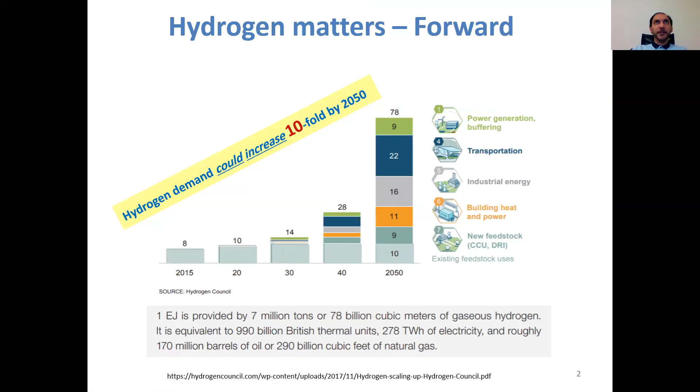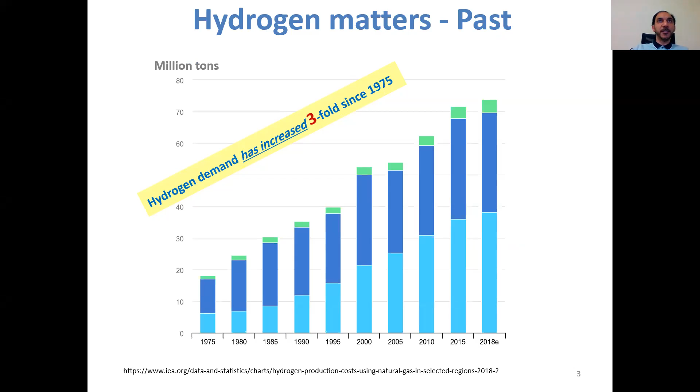And if you think, well, this is kind of a prediction, maybe it's true, maybe it's wrong. If you look at the history, if you look back instead of looking forward, you see that hydrogen demand has increased threefold since 1975. So hydrogen demand is increasing. It has been increasing for the past several decades, but it is expected to increase at a much higher rate in the next few decades.

So what is good about hydrogen? Why hydrogen specifically? Hydrogen is probably the most abundant element in the universe. If you're talking about Earth, Earth is two-thirds water on the surface, and water is two atoms of hydrogen and one atom of oxygen. So that's plenty of hydrogen out there. It is also compact. If you extract hydrogen, for example, from water, you can compress that and store a lot of energy in a very small volume, so it's a very compact energy resource. And it is odorless, if that's something that would bother you, or if you care. But it doesn't smell.

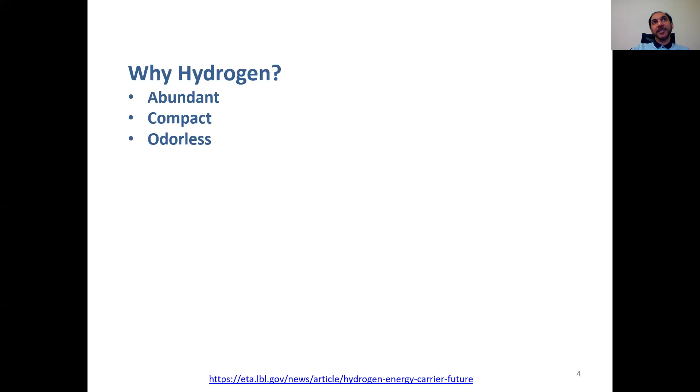Now, what is hydrogen used for? Most of the uses for hydrogen so far are these purple bubbles, the industrial applications for hydrogen. Hydrogen is used to produce ammonia, which is a huge industry, and by the way, Saudi Arabia is one of the largest producers of ammonia in the world, so it's a big industry here. Hydrogen is used for metal refining—if you'd like to extract steel, you can use hydrogen, so it's used a lot. And it is used in many other industrial applications. But that is not only where hydrogen is used.

That's not the only place hydrogen is used. Hydrogen is used for heating, you can use it as fuel and burn it to get heat. You can also use hydrogen to synthesize fuels, combining hydrogen with CO2 to produce methanol or gasoline. That's a big plus because it consumes some CO2, which helps preserve the environment.

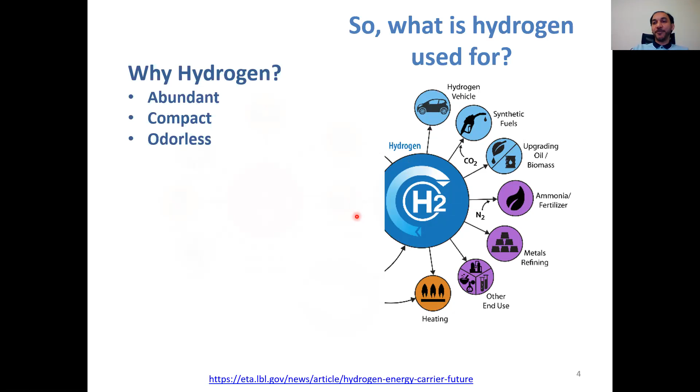In fact, hydrogen is an energy carrier. What does that mean? If you look at the right-hand side here, these are all the applications that require energy. We use energy for electrical appliances, for transportation, we need fuel, we use it for industrial fuels, and to produce chemicals. These are all the different applications that require energy.

Now, where is the energy coming from? It's coming from the left here. Energy can come from fossil fuels like oil and natural gas, from nuclear reactors, from renewables, and other means of producing energy.

Now, how do we get energy from the supply to the end use, from the left-hand column to the right-hand column? Typically we use electricity: we convert fossil fuels to electricity through power plants, burn the fossil fuel, produce electricity, transmit it through long distances, and use it on the right-hand side for electrical appliances, transportation, and industrial uses. You can replace electricity with hydrogen, or you can complement electricity with hydrogen. You don't have to replace it 100%; you can complement it, and they can work together.

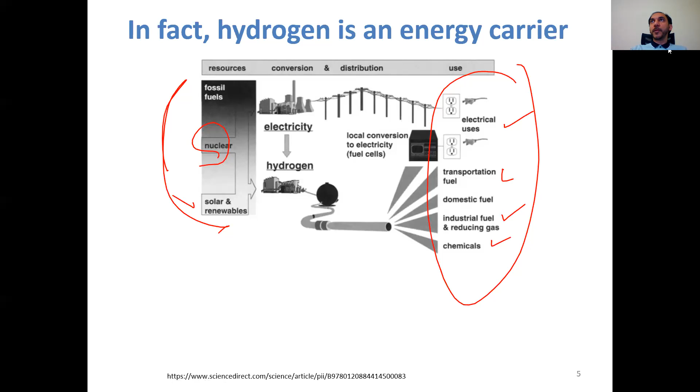We are going to see that they can actually work together pretty well, hand in hand. Now, in some cases, hydrogen can even beat electricity. I'm coming from an electrical engineering background, and I dare to say that. So sometimes, honestly, hydrogen can beat electricity, but very often electricity is a better carrier. It depends on the circumstances, but when they work together, they can do wonders.

An example where hydrogen can beat electricity is shown in this colored picture. On the left, you have renewable resources. On the right, you have consumers of fuel or energy. In the middle, there is water, let's say the ocean. We are producing energy on the left-hand side and consuming it on the right-hand side, and we'd like to transmit that energy from left to right. We can use transmission lines, electricity, underground cables, or marine cables underneath the ground, which are being used in many parts of the world.

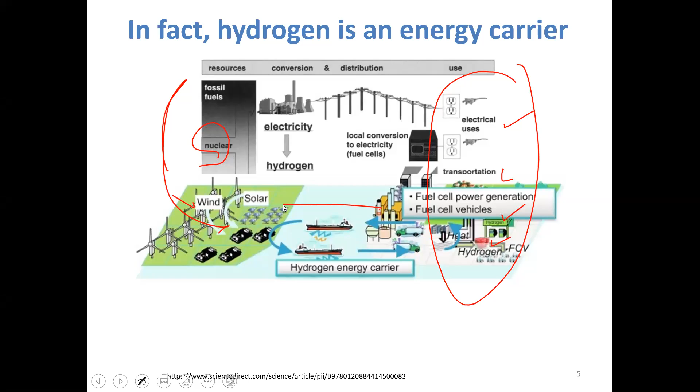But for that application, hydrogen looks like a very feasible alternative. You can turn the power produced by wind and solar into hydrogen, ship that hydrogen, and then turn it back into whatever energy form you'd like on the right-hand side. So sometimes hydrogen actually has an edge.

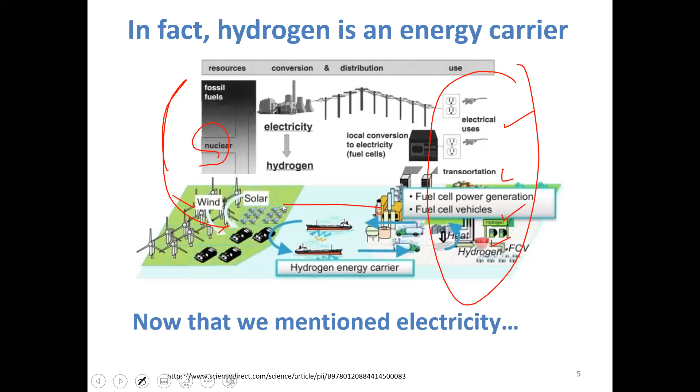Now that we've mentioned electricity, given that my background is in electrical engineering, I cannot escape talking a little bit more about it. You're probably aware that, according to Vision 2030, the Kingdom of Saudi Arabia is targeting to produce 58.7 gigawatts of electric energy from renewable resources. And if you're wondering how big that is, today's generation capacity in the Kingdom is 70 gigawatts.

So if you put all the generators in the kingdom together, running simultaneously, they are able to produce about 70 gigawatts of power. By 2030, the target is to have up to 120 gigawatts of generation capacity kingdom-wide. Out of that, about 60 gigawatts are going to come from renewables, so renewables will form about 50% of the total generation resources.

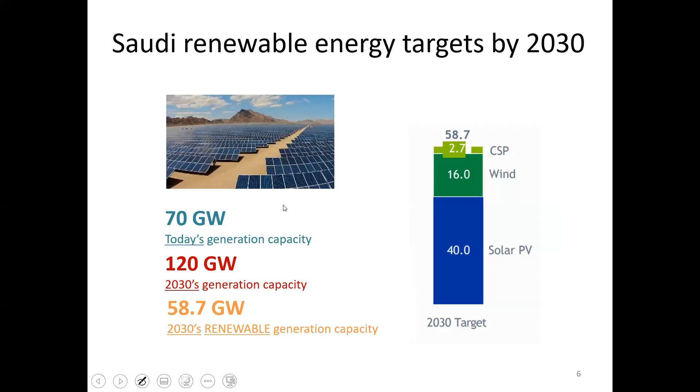That's huge. Now these renewables are going to be scattered everywhere. They're going to be mostly solar PV, solar photovoltaic resources, but there will be some wind, and a little bit of CSP, concentrated solar power. Wind is clear, you produce electricity from wind. The difference between solar PV and CSP is that in solar PV you convert the light from the sun into electricity, while in CSP you convert the heat produced by the sun into electricity. So the focus more in Saudi Arabia is on solar PV, but there will be some small capacities of CSP also, and some wind.

Now, the challenge with renewables is that they require a lot of flexible resources. What do I mean by that? This curve in front of you is called the net load curve for multiple years, for a typical day in the year. The x-axis is time, 24 hours, and the y-axis is the electric load consumption in California. This is taken from California ISO, the California Independent System Operator.

This is actually not the load, this is the net load. The net load is the load minus the solar PV power output in California. So net load equals load, the electric load in megawatts, minus solar PV output. That's the net load. Now why does that matter? It is the net load that needs to be met with the other generators that are not renewable generators.

There is some wind, but not as much as solar. So if I have an electric load of, say, 30 gigawatts, and my solar is producing 10 gigawatts, 30 minus 10 is 20 gigawatts, that's the net load. That is how much I need to produce from non-renewable resources. So that really matters for me.

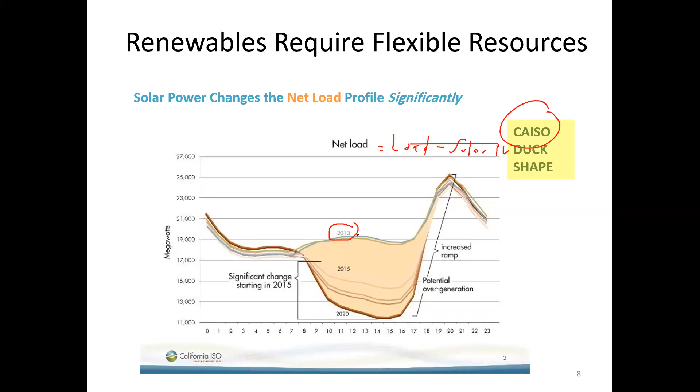Now, if you look at the 2013 curve, the blue curve here, it is kind of a nice curve. The load increases at about 7, 8, or 9 p.m. because of lighting, people starting to cook and so on. So that's an evening peak.

Now, during the daytime, the net load is reasonable. The load would have looked something like this, but because solar produces a lot during daytime, the net load, which is load minus solar, is the blue curve shown here. So solar is good, it's reducing our peak demand around noontime. It is not able to reduce our peak demand in the evening, but that's fine, at least it's helping with the peak demand at noontime.

Now, what happens if you have a lot of solar PV, which is what is happening in California? The PV penetration has increased in the past several years, and the net load looks like this brown curve at the bottom. So what is the problem with this curve? It shows that during daytime, the net load is actually at its minimum, load minus solar PV is at its minimum. That's not a problem. The problem is if you compare the minimum with the peak, you get a huge variance, a huge difference.

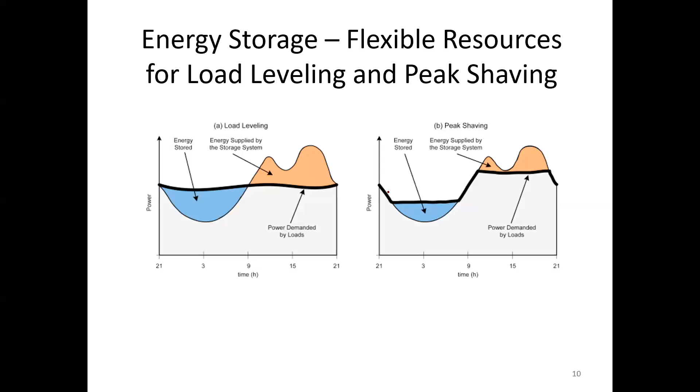One of them is hydrogen. You can use hydrogen to store energy. If you have plenty of renewables produced with your renewable resources, you can convert the additional unneeded renewable production into hydrogen. You store it, and whenever you need it, you can convert that hydrogen back into electricity using fuel cells.

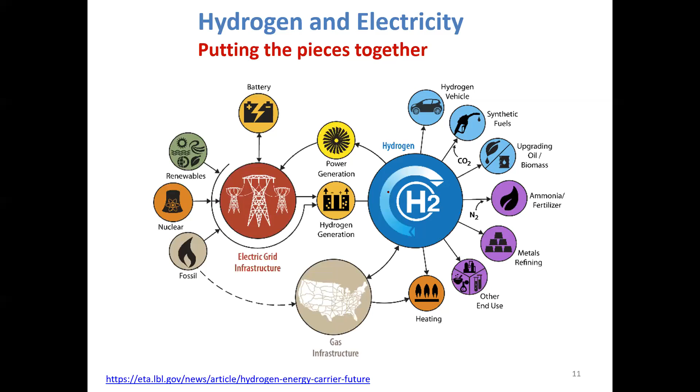So now I come back to this picture that I started with, and let's put the pieces of the puzzle together. On the right-hand side, you see the hydrogen, and on the left-hand side, you see the electric power system, and you can see that they can work pretty well together. So you are producing electricity either from fossil fuels, from nuclear plants, or from renewables, and all that power is injected into the electric power system.

There are electric loads that are going to consume a lot of power from the electric power system. But maybe during times when there is an excessive amount of energy being produced, especially from renewables, because some of these renewables are not predictable or controllable, if you're producing more than we need, we can store some of that energy into batteries, or we can store it into hydrogen.

So we run that into a hydrogen generation plant, maybe using electrolyzers. This is an electrolysis process, which we're going to talk about in a few minutes. Then we produce hydrogen. And whenever we need to produce more electricity, I can use some of that hydrogen back using fuel cells. So that is a reversible process: I can go from electricity to hydrogen using electrolyzers, and I can go from hydrogen to electricity using fuel cells.

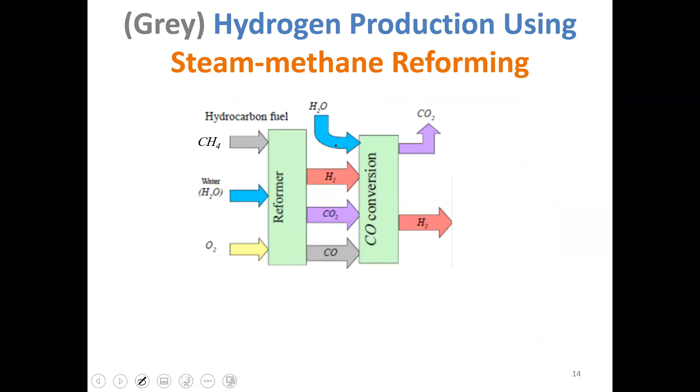Okay, why don't we do green hydrogen? What is wrong with green hydrogen? It is still very expensive. This chart here shows, roughly speaking, the cost of producing hydrogen in US dollars per kilogram of hydrogen. This is gray hydrogen on the left. This is blue hydrogen using natural gas. And this is blue hydrogen using coal. And then this is green hydrogen from renewables. You can see there is a big difference in price. So yeah, we need to work on that a little bit.

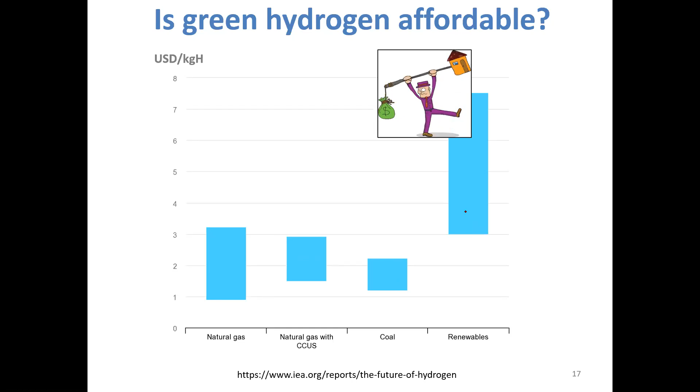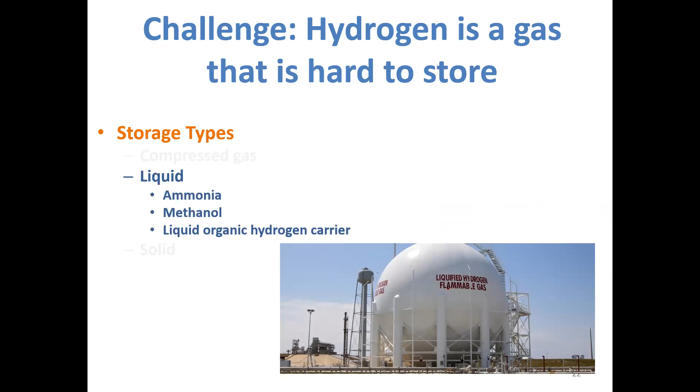We can either compress hydrogen and store it—you can see here in the figure vessels where compressed hydrogen is being stored—or it can be converted into a liquid like ammonia or methanol and stored. That makes storage a lot easier because it's not gas anymore, so you can store huge volumes. Or it can even be stored as a solid. This is kind of a hydrogen battery, if you like.

Next, I'm going to show a few examples where hydrogen is being taken seriously. I'll start with the NEOM project. NEOM, on the Red Sea on the west coast of Saudi Arabia, is building a huge green hydrogen infrastructure based on electrolysis. We'll have a lot of wind and solar, which will go into an electrolyzer to produce hydrogen.

Ammonia is made of 1 atom of nitrogen and 3 atoms of hydrogen. So we need nitrogen, and nitrogen is going to come from an air separation unit that also requires electric energy. That electric energy will come from the renewable resource on the left, which will feed both the electrolyzer and the air separation unit.

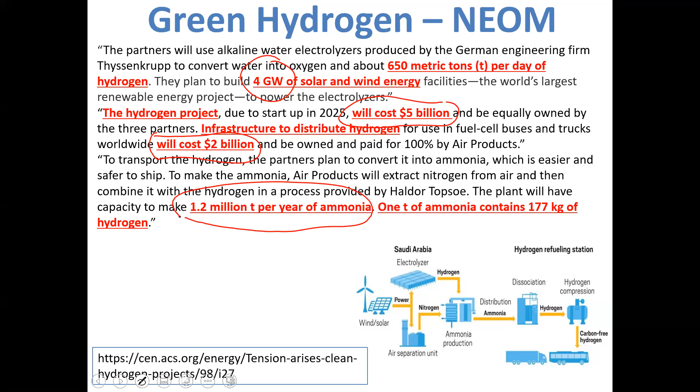And we are not alone. In Germany, they are building huge infrastructure to produce green hydrogen and to distribute it using natural gas pipelines. So they are not going to ship hydrogen using vessels or trucks, but rather they are going to use the existing natural gas pipelines.

That has its own challenges, of course. Hydrogen is a lot more explosive than natural gas, so you need to be really careful when you do that. Usually they do it in stages: they inject only 5% hydrogen, increase it to 10% and so on, in small increments, to make sure the natural gas infrastructure will be able to deal with that new gas, which is hydrogen.

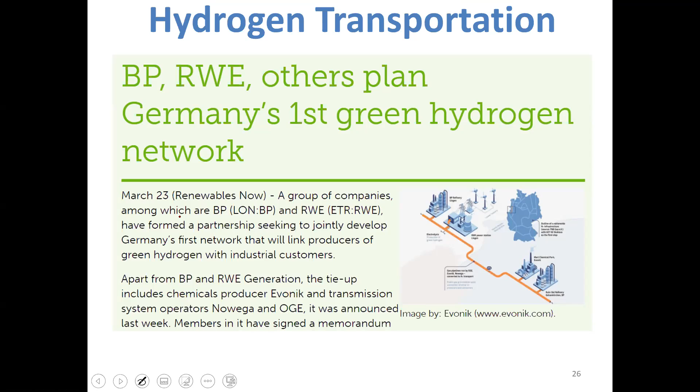I'll skip that. In Australia, they are thinking along the same lines. They are going to use renewables to produce hydrogen using electrolysis, and then convert that hydrogen to ammonia. Some of that hydrogen will stay in its gas form, distributed within Australia using natural gas networks, and some will be shipped overseas after being converted to ammonia.

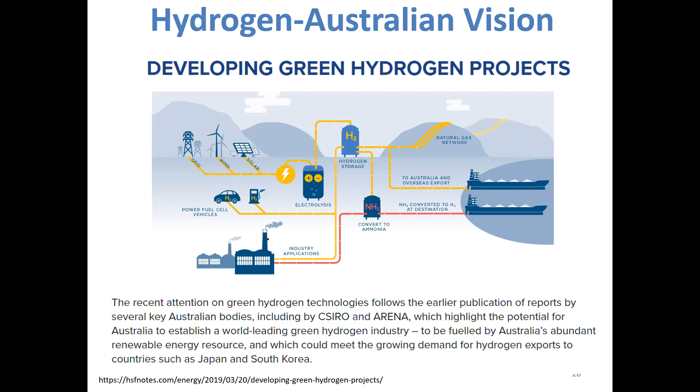And the EU has a big vision for hydrogen. They are planning to produce 6 gigawatts of green hydrogen from electrolysis by 2024. That number is expected to increase to 40 gigawatts by 2030, and even beyond that after 2030.

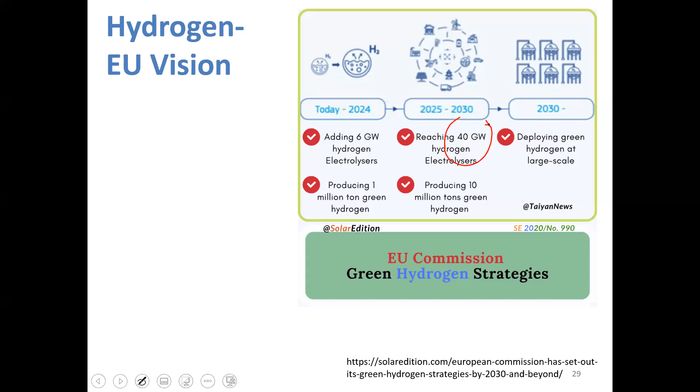The Japanese have a very interesting approach. I'm about to end here. Instead of going big, they are going small, doing distributed hydrogen. So they build small electrolyzers and install them in hydrogen fueling stations.

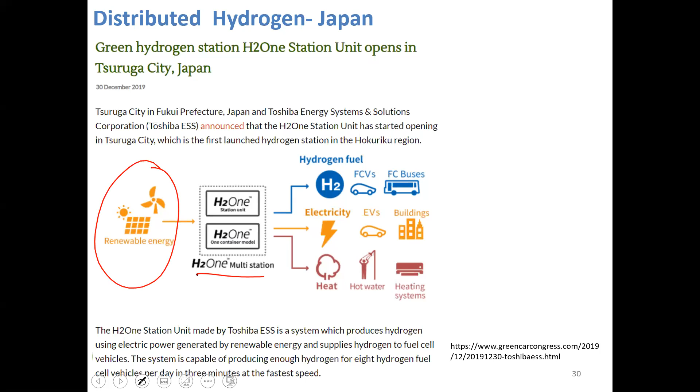So if you have a hydrogen electric car, you go to the fueling station. The fueling station itself has an electrolyzer and renewable resources, so everything is local. Renewable resources in or near the fueling station, and an electrolyzer local in that place, producing hydrogen locally, which is then injected into cars or whatever.

I'm toward the end, so I left this boring definition that's usually used at the beginning of presentations, the definition of what hydrogen economy means. I left it to the end. I thought you might be more interested in pictures and figures, so I left this toward the end here.

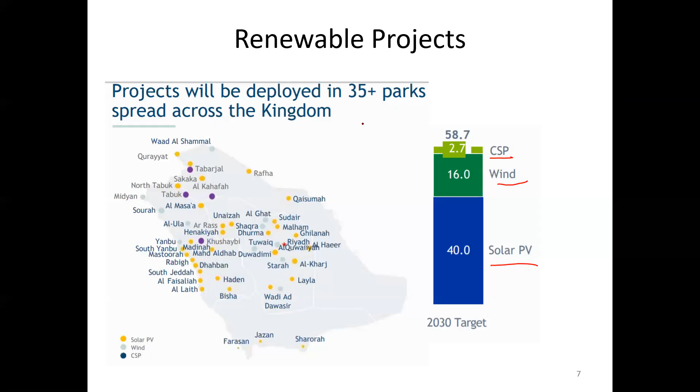So if my wind resource is producing less than what I expected, then I'll have to produce more from another resource so the total generation is exactly equal to 6,000 megawatts. That's the problem, and it creates an issue if you are using renewables. If you have conventional resources like thermal or hydro generation, these are controllable resources — if the load increases, you can increase your power output from your generators, and you're going to have no problem.

The problem with renewables is that the load might increase, and at the same time, your wind is decreasing, so you will have to compensate for that. To compensate, you either use a flexible resource like hydro, or if you have stored some of the wind energy when the wind was blowing really fast, you can use it when the wind goes down. That's why we cannot use just the average. Okay, and what was the other question? I forgot the second part of the question.

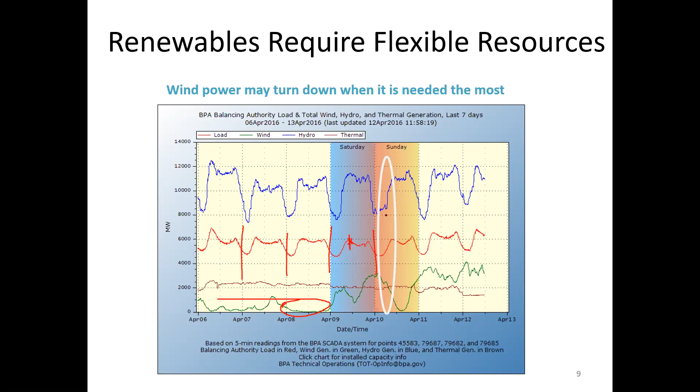Let me give it a shot. This is it - you just need a fuel cell. A fuel cell is not something new, by the way. The fuel cell technology has been around for decades. I think the first fuel cell was built in the 1830s maybe.

But because a fuel cell requires hydrogen as fuel, and hydrogen is not available everywhere, fuel cells are not very popular. You can think of a fuel cell as a generator - it is a generator, but it does not have any moving parts. And the fuel is hydrogen.

So the way it works: you inject hydrogen, and those of you who are chemical engineers, allow me to talk on your behalf a little bit. I'm not going to do an excellent job, but I'll give it a shot. You inject hydrogen on one side, on the anode. You inject oxygen on the cathode, and then you have an electrolyte in the middle.

The hydrogen protons will travel through the electrolyte from the anode to the cathode, and the electrons will travel electrically through wires. So if you connect an electric load between the anode and the cathode, if you connect a lamp between them, the lamp will start to shine. That is how you convert hydrogen into electricity using a fuel cell.

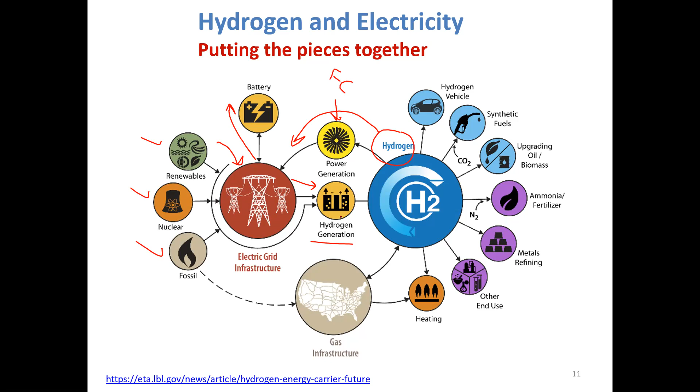He's asking, are electrolyzers similar to batteries? Yes, in some sense they are electrochemical devices, so in that sense they are similar to batteries, but batteries do not require fuel. Electrolyzers require, well, actually, maybe if I can change the question a little bit.

Maybe if we compare fuel cells to batteries, that's a more fair comparison, because batteries produce electricity and fuel cells produce electricity. Electrolyzers do not produce electricity, electrolyzers consume electricity. So if I may rephrase the question: are fuel cells similar to batteries? The answer is they are both electrochemical devices. However, for a fuel cell to operate it has to be provided with fuel all the time, and that fuel is hydrogen. But for a battery to operate, it does not have to be provided with fuel, the fuel is already inside the battery, and it will keep operating until the energy inside is consumed, and then it will stop operating and need to be recharged with electric energy. So that's a big difference between a fuel cell and a battery. A fuel cell will keep operating as long as you keep providing it with hydrogen fuel. So a fuel cell is somewhere between a battery and an electromechanical generator, because it is similar to a battery in the sense that it's electrochemical, and similar to an electromechanical generator because it requires fuel.

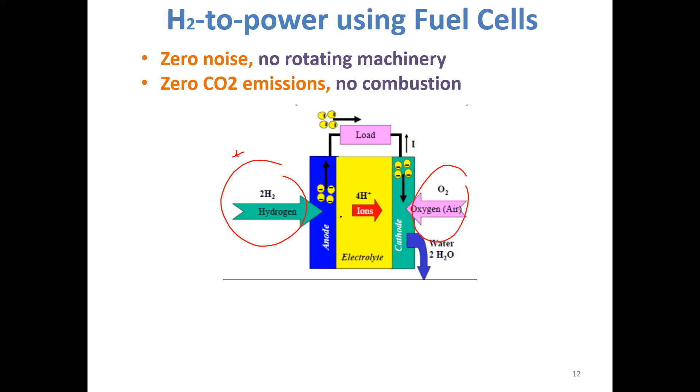That's another excellent question which is not paid attention to very often. When we are going to produce hydrogen using electrolysis, we need water. And if you are in a country like Saudi Arabia, clean drinking water is a precious element, it is not available everywhere, we work hard to produce it using desalination. So you need to start questioning, or at least taking this issue seriously: where are we going to get the water from? We need plenty of water, a lot of water, to produce hydrogen from electrolysis.

If you are going to do this, and we are going to do this in the Kingdom here, then that water cannot come from seawater, because that's going to be too salty. Electrolyzers will fail very quickly if we use seawater. So we have to use desalinated water. And yes, desalinated water consumes energy to be produced, and it depends on how you are powering up the desalination plant. If the desalination plant is not being powered up from a renewable resource, then that will emit CO2 also.

So maybe if we are going to build an electrolysis plant, then we should power up the electrolyzer from the renewable resource, the air separation unit from the renewable resource to get nitrogen, if we are going to convert hydrogen to ammonia, and the desalination plant to produce desalinated water. So that's an issue that is often being underestimated, overlooked by many people when they talk about electrolysis.

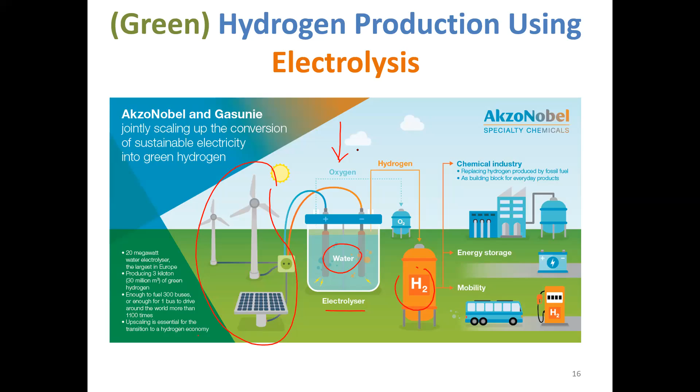Yeah, great question again. Okay, there are multiple dimensions to this issue. One is that today's Saudi economy is heavily reliant on fossil fuels, especially oil. The plan is to gradually turn away from that, or at least reduce the reliance on oil. So a project like this will help reduce the reliance on oil. That's one aspect. The other aspect is, we are also producing a very valuable product, and it is an energy product. So instead of producing oil, here we are producing hydrogen or ammonia that is an energy carrier.

The other aspect is, you look at all the spikes in oil prices. A few months back, oil prices turned negative. Do you know what that means? That means that some of the oil producers had to pay money to the oil consumers to buy that oil. They are being paid to consume that oil. That's how volatile oil prices are getting lately. Okay, now, for the past several weeks or so, oil prices have recovered, and recovered very well. So right now, oil prices are very reasonable in the past several weeks.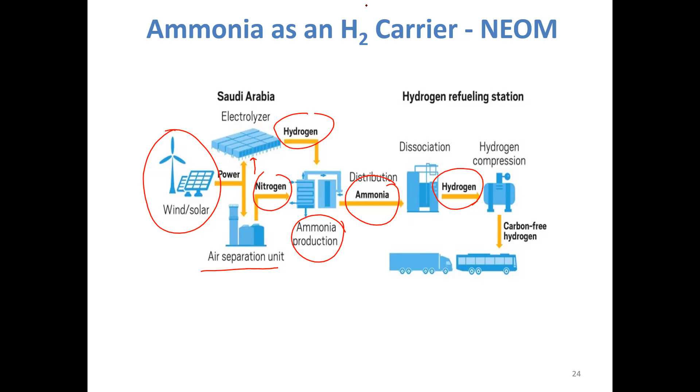This is point A. Point B is that these prices are only average prices, so they do not apply everywhere. If you are in Saudi Arabia, you have a lot of sun, alhamdulillah, so solar prices are getting very low. But if you are in Germany or the UK, where it's quite cloudy a lot of times during the year, or in the northwest of the United States, which is actually more cloudy than sunny, solar will never get there - the solar cost is much higher than the average. So you'll find countries well suited to produce energy this way, and countries that are not suited to do that. Japan, for example - why is Japan interested in all this hydrogen stuff?